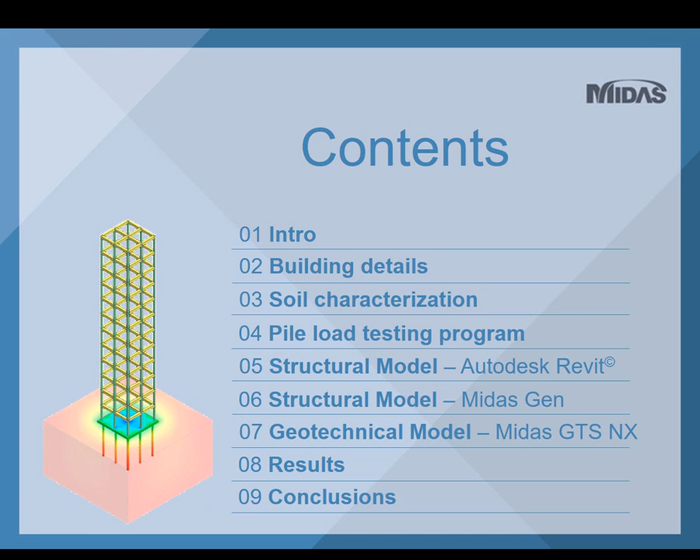The building, which is the focus of the presentation, is a 55-story building, about 168 meters tall, designed in a layered soil of low resistance. Because of the size of the building and the soil found at the site, soil structure interaction was necessary to evaluate the settlements and also to evaluate the behavior of the structure.

The structural team, in this case, did not work with MIDAS-Gen, and their platform did not export to Revit or to another format, so it was impossible to directly import their model. So what we did next was our team replicated the designed structure with the very same geometry, loads, and load cases used by the structural team. This model was fully created in Autodesk Revit. With the Revit-MIDAS-Gen link, the model was then exported to MIDAS-Gen, and after applying some conditions on Gen, the model was finally exported to MIDAS GTS NX, where the full model was analyzed.

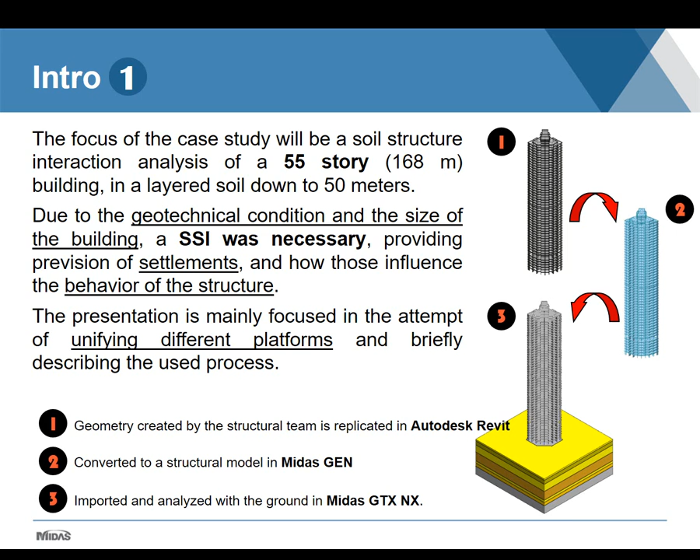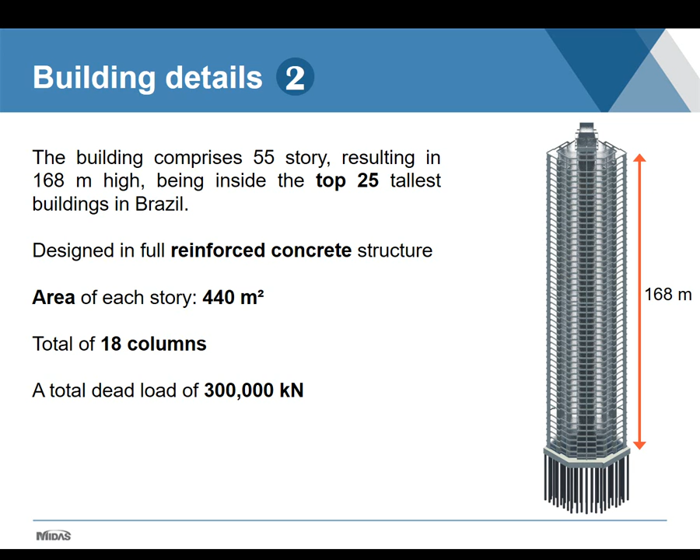As I said, the building comprises 55 stories, resulting in something close to 168 meters tall, meaning it's one of the top 25 tallest buildings in Brazil today. The whole structure is designed in reinforced concrete, which is the most common type of structure here in Brazil. Each story has an area of about 440 square meters. We have a total of 18 columns, which are actually structural walls because of their size, and a total estimated dead load of about 300 meganewtons.

Some other building details now about the foundation. It is a pile raft foundation with 106 CFA piles. CFA piles are continuous flight auger piles. Each one has 100 centimeters of diameter and 30 meters long.

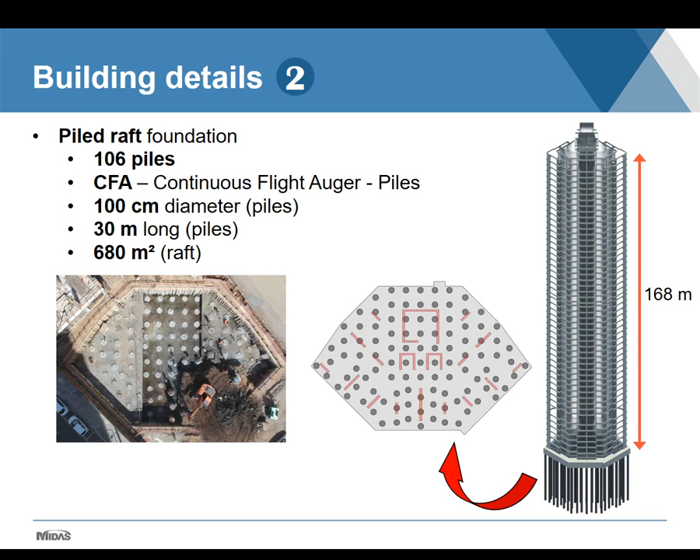Also, we'd like to say that in this region, the use of cone penetration tests to estimate pile load capacity became something usual in recent years, mostly due to the quality of the test compared to the standard penetration test. On the next slide, I'll show you some results of pile capacity prediction based on cone penetration tests.

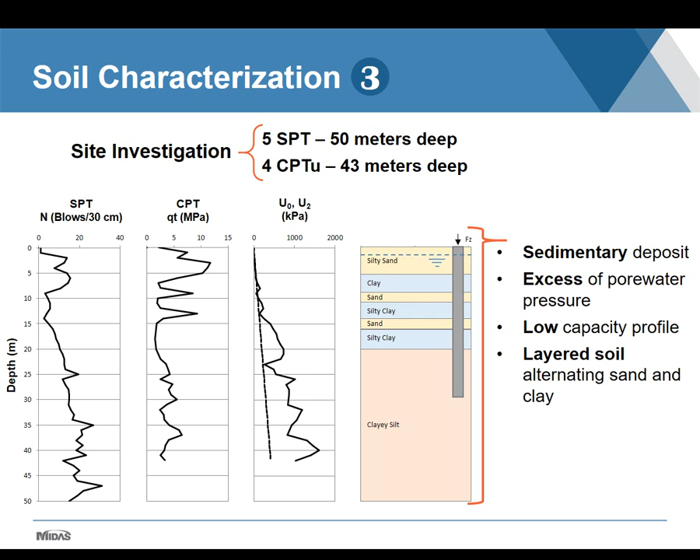A program of pile load testing was undertaken, which included 3 continuous flight auger piles tested to a maximum load of close to 9 meganewtons.

The static load tests were undertaken prior to the foundation construction, allowing a better understanding of the behavior of these piles. The results of the pile load test were compared to values obtained by theoretical approaches using methods based on SPT and CPT, standard penetration tests and cone penetration tests.

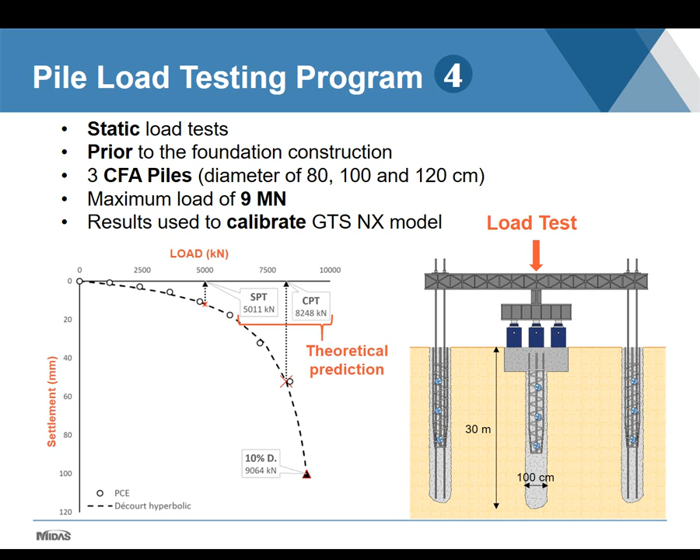Inside MIDAS GTS NX, the results from the pile load test were used to define the properties of the pile, as will be shown later. So it's very important to have pile load tests when designing a building foundation, especially tall buildings.

Let me show you a little bit more about the pile loading testing program. These are some pictures of the test. The figure shows the pile load scheme composed of the hydraulic jack, which applies the load, and reacts against the reaction frame.

In this case, we had 4 reaction piles to resist the forces. Also, an important piece of equipment is the load cell, which allows the loads to be read with more accuracy.

The geotechnical designers, in this case ourselves, started with the design of the pile load test. So we defined the type of pile, the diameter, the length, the maximum testing loads, and also the reaction system. We followed up the execution of the test, and later interpreted the results.

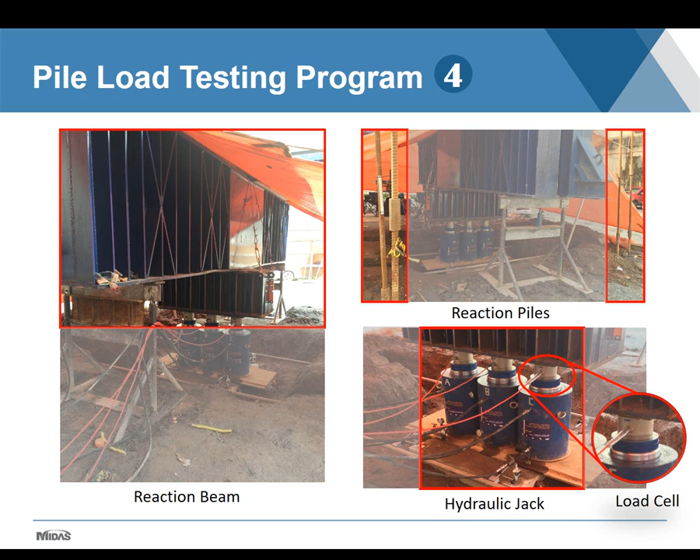Now heading to the structural model, it all started in Autodesk Revit. In this case, the structural team did not work with MidasGen, and their platform did not allow exporting to Revit or to any file format that could be imported by MidasGen. So our team replicated the design structure with the very same loads and load cases used by the structural team.

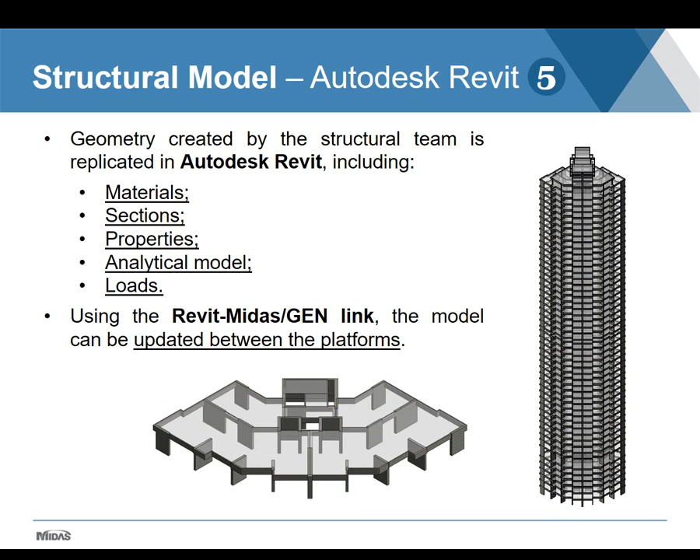All the materials, sections, properties, the analytical model, and loads were applied directly on Revit. I'll show you a bit of the Revit interface now.

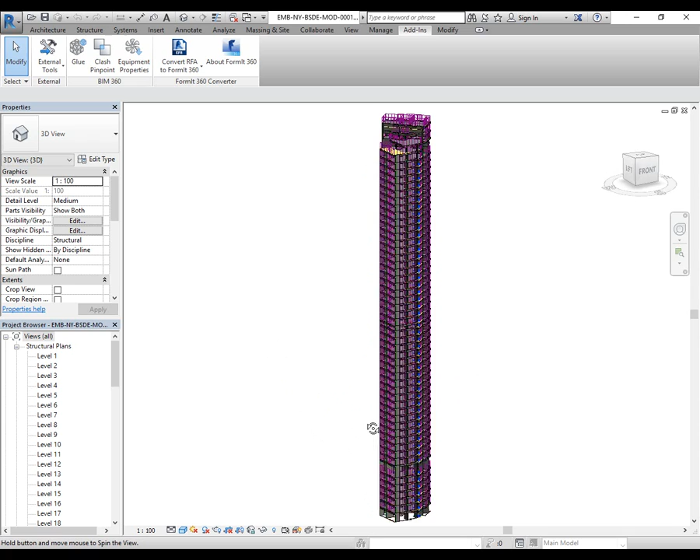So this is Autodesk Revit 2017, and we have our full model of our building here. You can see all the geometry, and you can see the arrows, which represent the applied loads.

The thing is, we want to take this model, which is now in Autodesk Revit, and export it to MidasGen. So there's a function, a link that needs to be installed on our computer. If you install it and go to add-ins in Revit, then to external tools, we have this option to send model to MidasGen.

Once it opens, you just choose the name you are going to save it as. Here you can choose the element size, which is basically the size of the mesh you are exporting. In this case, we have meshes in our slabs and also in our structural walls, so we can choose finer or coarser elements. Also, you can choose the unit and just click send, and it will save the MGT file.

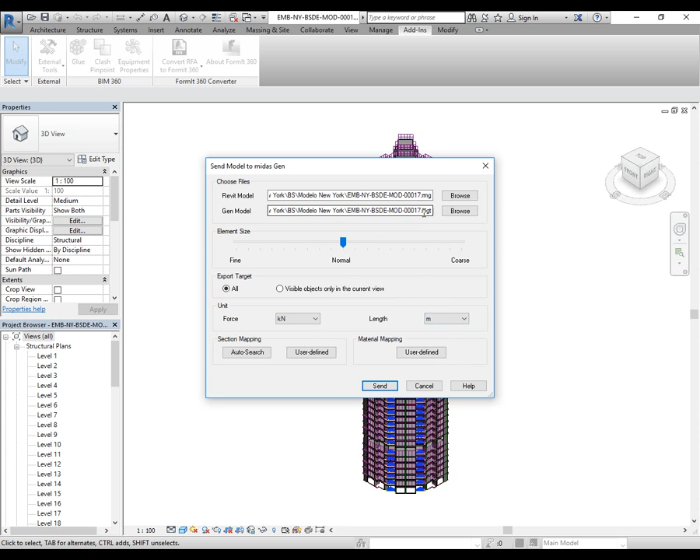I'm not sure about saving it now because it takes a bit of time, so let's head back to PowerPoint.

So this is already the view of the model imported to MidasGen, including all the geometric information, sections, materials, and properties. I'll show you a bit in the MidasGen interface.

So this is just a blank new file where we go to the menu and import the MidasGen MGT file, which was exported by Revit. Let's choose this one that I've saved before. It takes a little bit of time to open up.

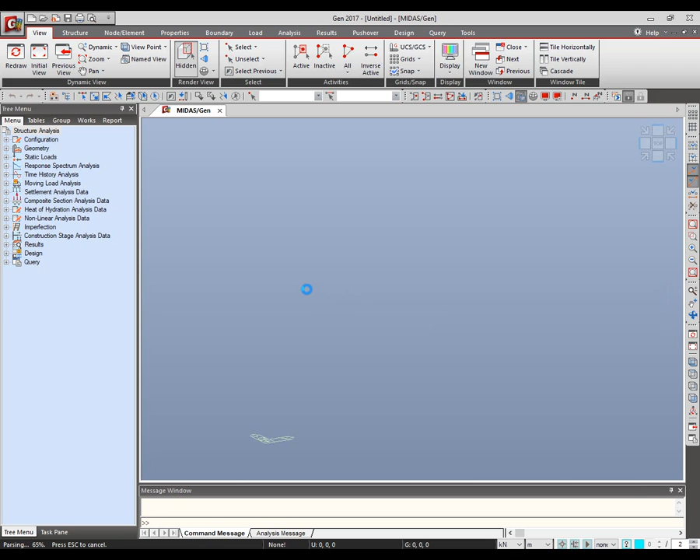As you can see, the message shows it was imported with 0 errors and 0 warnings, which is good. Sometimes you may get some errors, so I'll just take a closer view for you to follow up.

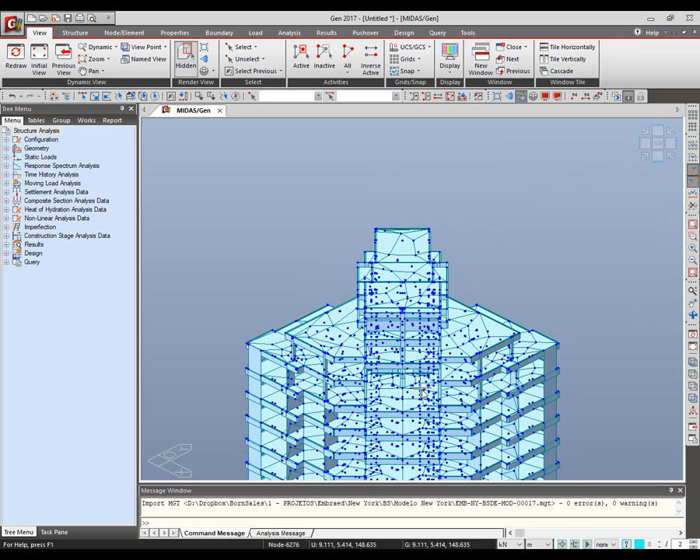You can see the mesh. We could have chosen an option to get it finer, so the mesh should be finer. We also show here in the menu what was imported. If you see, it already says the number of stories, so we just need to configure the information to speak the same language, let's say with MidasGen.

We have the material, they were imported, from the concrete that we have predefined there in Revit. You also have all the predefined sections that were defined in Revit. We have information about thickness, because of the slabs and structural walls. We have some boundary conditions, some elastic links, and some beam releases, which are also defined in Revit.

Lastly, we have the loads. In this case, we have just applied the dead load case, but we may also apply others. We left live loads and wind loads to be applied directly on MidasGen.

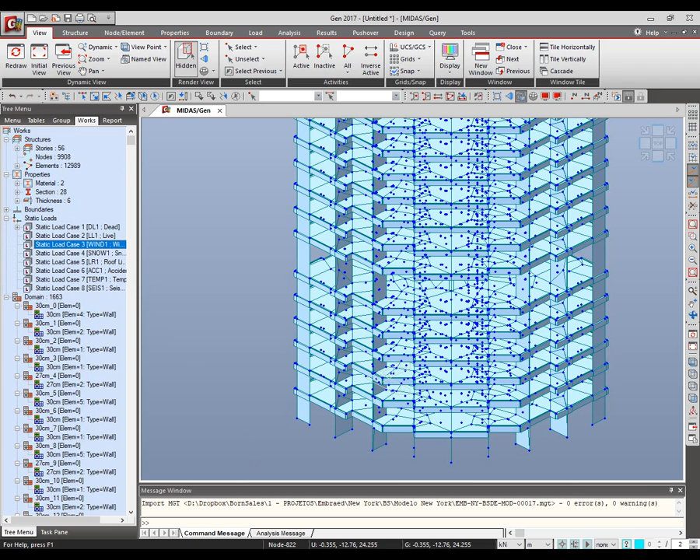So let's head back to PowerPoint. Inside MidasGen, some conditions were applied: confirming the story information, some initial boundary conditions, and the wind loads, which in this case were derived from wind tunnel results, so they were simply applied in MidasGen.

The model was then analyzed to check for inconsistencies, comparing the reactions obtained by the structural team on their platform and those obtained by us on MidasGen. The difference was smaller than 5%, which we considered a very good approach. Along with the structural team, the behavior of the model was approved and then exported to Midas GTS to start the foundation iteration process.

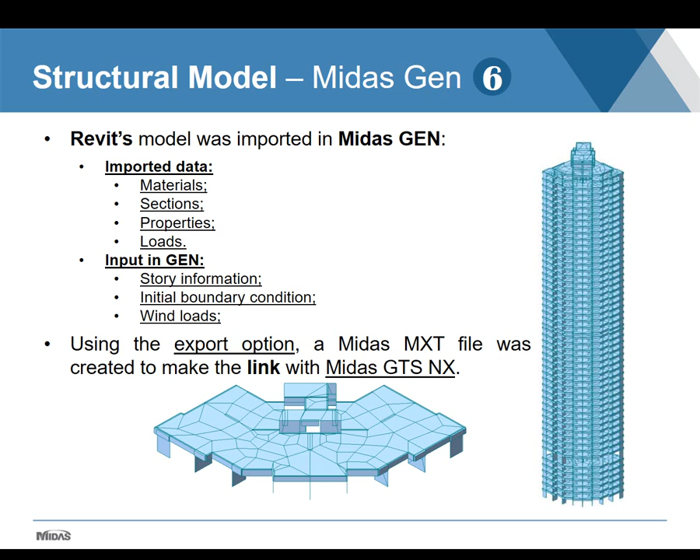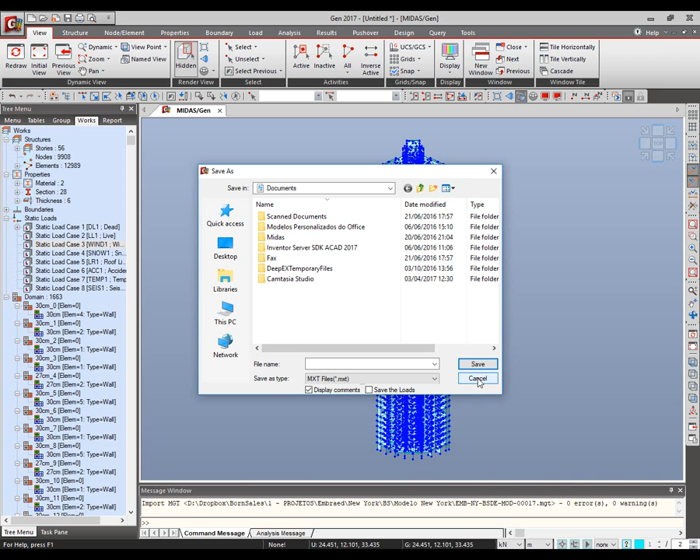So let's head back to MidasGen. I want to show how to export. We have the full model here of the structure, and we want to export this to open in Midas GTS. So we go to menu, export, and we choose the MXT file for GTS. You just save it, and later we can open it in Midas GTS.

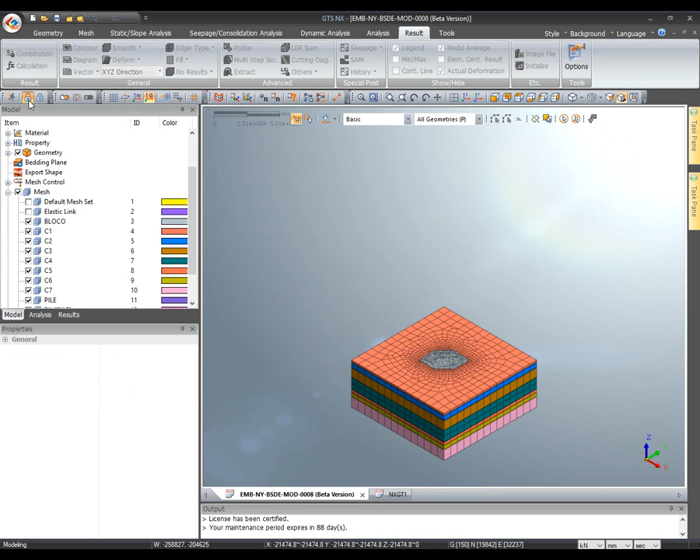Let me show you the model in Midas GTS NX. So let's check it out, first the model itself. We have all the soil layers, but let me show you first the raft and the piles: all the 106 piles and the 3.5 meters thick raft.

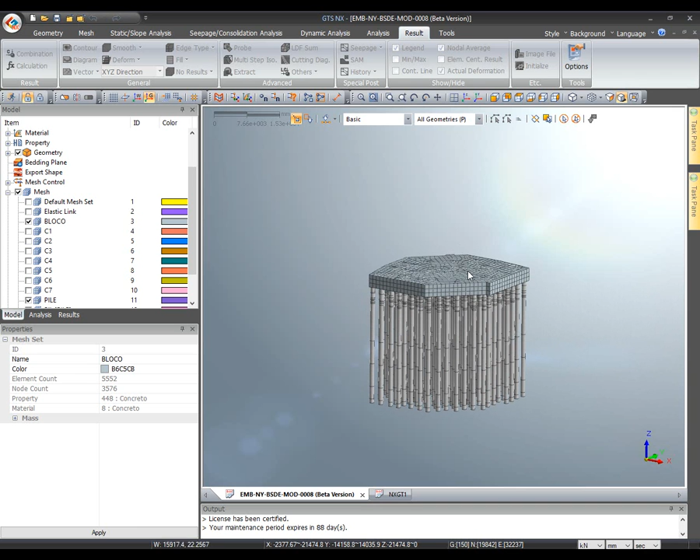So let's go back to PowerPoint.

For the pile model type, there are some ways to work with piles in numerical models. The best way would be to consider all piles as solids and define the interface properties to simulate its behavior. Well, the problem is that the model becomes way too heavy to compute.

So a solution that can also be done in Midas GTS-NX is to consider the pile as a beam element type, converting a line to a beam and creating an interface to simulate its behavior. Besides it not being the best solution numerically speaking, it still offers good results when calibrated. So the model is equal to the soil, which is composed of a solid mesh, plus the piles, which are lines converted to beams, and interface lines to solid.

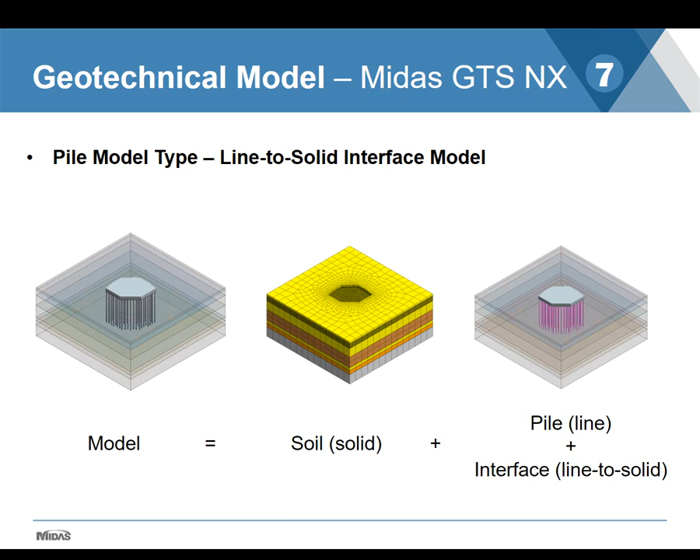So let me show you the piles. They are actually just lines that are converted to a beam, so they have a cross section, and also they have properties of a pile, so we can specify what their behavior is.

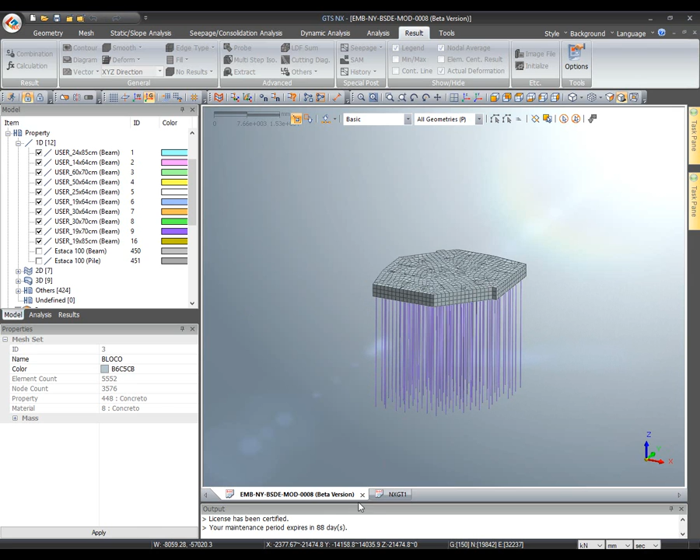So trying to obtain better values, we've done a pile load test calibration. Inside Midas GTS-NX, we've created a finite element model to calibrate the load settlement behavior. The geometry of the pile was reproduced, different load steps were defined, and the pile parameters were changed through trial and error attempts. That's what we call a class C prediction, where parameters are changed looking for convergence with measured values.

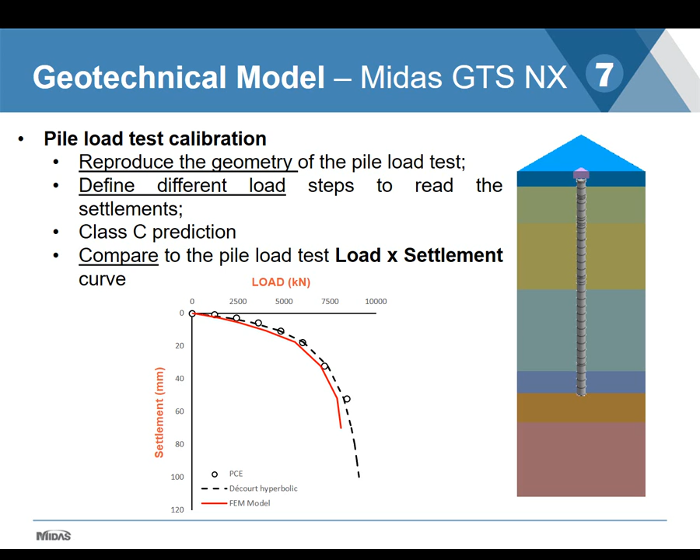The load settlement curve presented shows the pile load test results along with the finite element model created. The values obtained seem to fit well with what was measured, and so this kind of model might be tricky because it might need many attempts, but we really believe that this is the way to go. You have better information, a better model if you go this way.

So some numerical models of building foundations are made only by applying a load or pressure at the base of the columns. It is like retrieving the load values for each column from the structural team and applying it directly to the model. This might neglect the distribution of loads in the superstructure and its stiffness or rigidity, as you wish. So those results might then deviate from the real behavior of the structure, showing higher values of differential settlements.

So looking at our model, we've tried to create a full model, which is the soil plus the pile raft plus the structure. As was said, it is understood that the differential settlement behavior seems to be closer than when using other kinds of models. Another advantage is being able to evaluate different load cases directly, and also wind loads and other types of loads. So let me show you the complete model here.

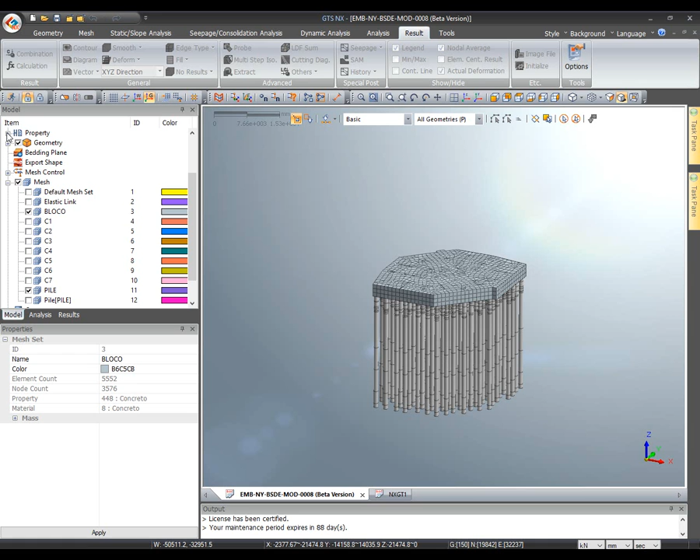We have the pile raft. Now we have the building, the superstructure, and all the soil layers, all 7 soil layers that we've created for this case.

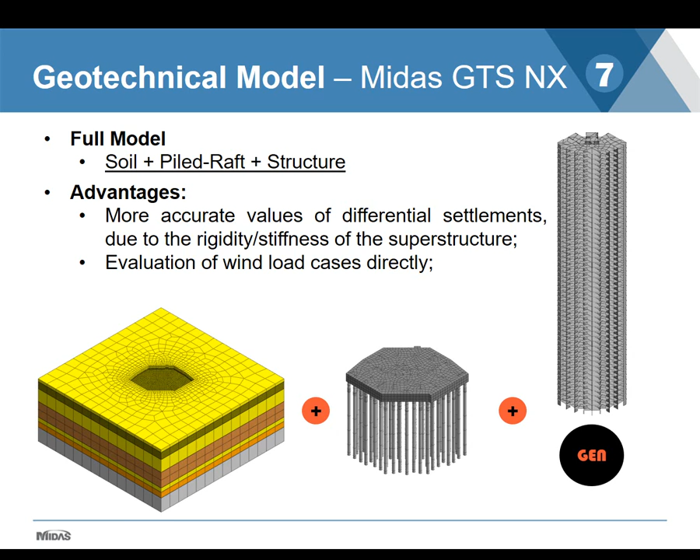As stated before, as this model is working with the whole superstructure attached to the foundation, the results of settlements, and especially the differential settlements, tend to be more realistic due to the stiffness and rigidity of the superstructure.

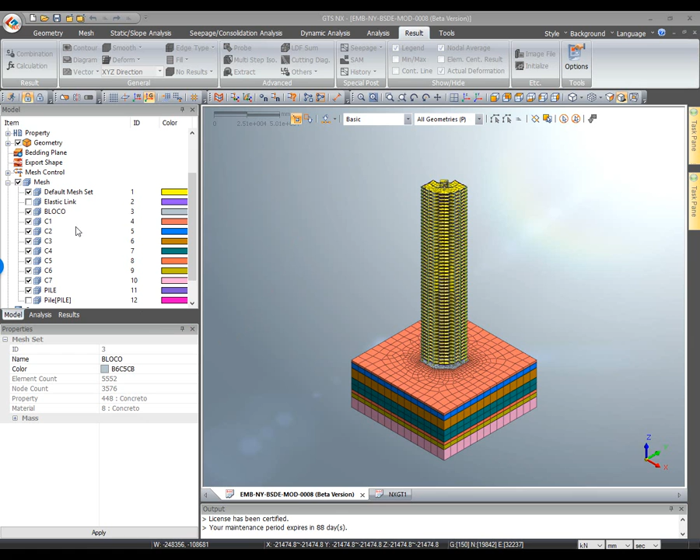Let's take a look at the results in Midas GTS. Let's see only the piles. So in the results displacements, we can check the values of settlement in each pile.

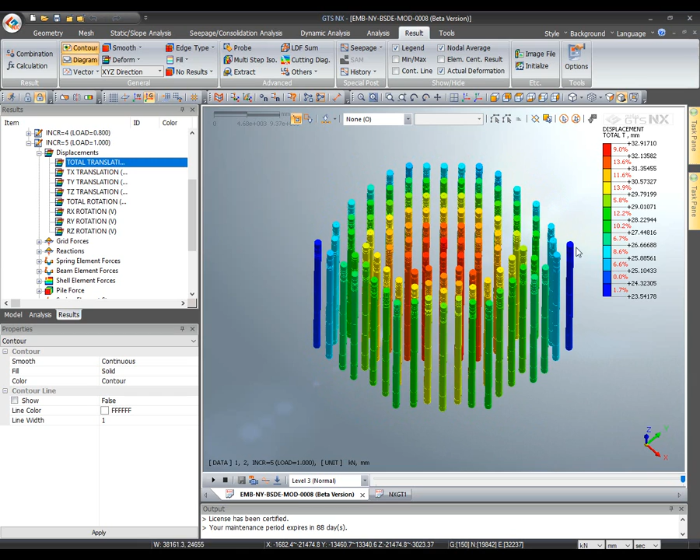We can also select each pile node by its top and export these values of settlement. Here in the presentation we have called the settlement delta.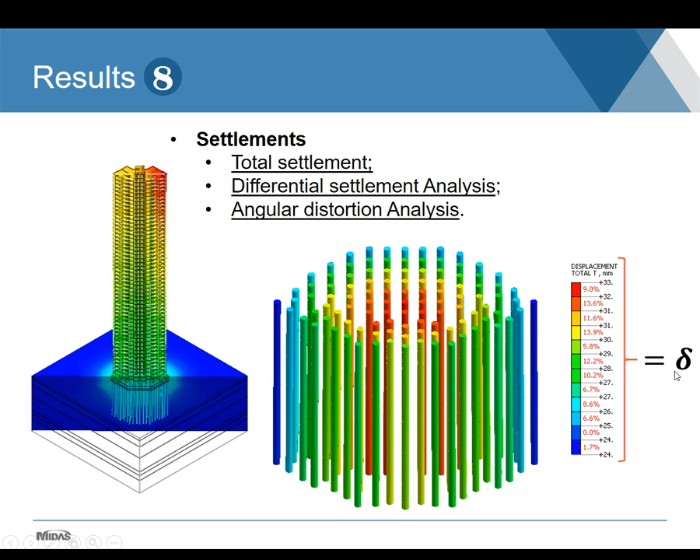Those springs are different for each pile, and this might be understood by us and by our structural colleagues. The reason for this is mainly the position of the pile inside the raft, which can be affected by the location of a column. We may understand this as a more or less loaded region, or due to pile group effects, which tend to decrease the performance of the pile, meaning that some may not offer the same reaction as others.

The generated springs for each pile may be sent to the structural team or simply exported back to MIDAS Gen. The very same thing can be done for area springs, for the consideration of a pile raft hypothesis.

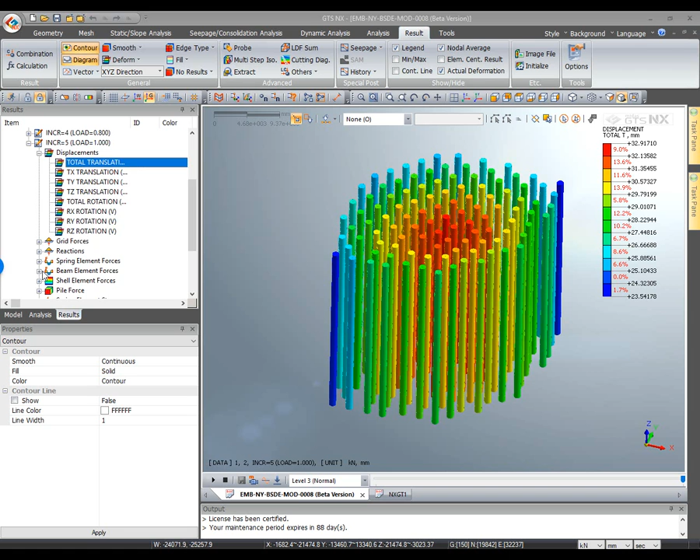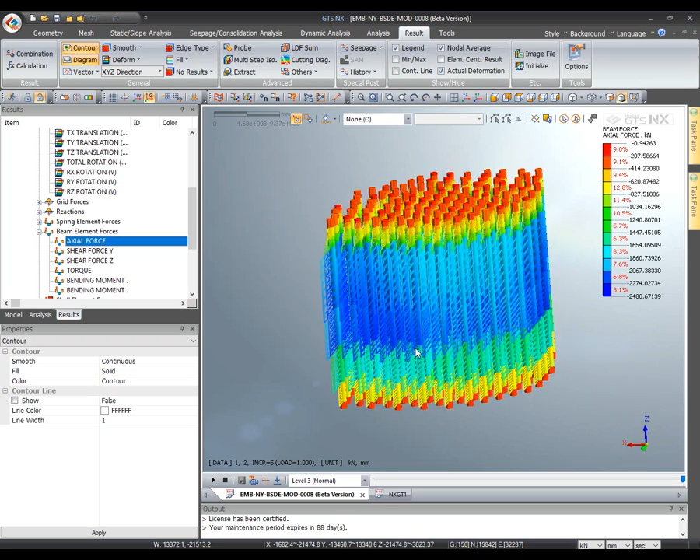Values of pressures above the raft might be divided by the settlement obtained at the same point. This can also be sent to the structural team or exported to MIDAS Gen. Taking a look at the results of axial forces in our piles, as I said before about extracting those values, we can extract the value of each pile. These values can be copied from MIDAS GTS and pasted into a spreadsheet in Microsoft Excel.

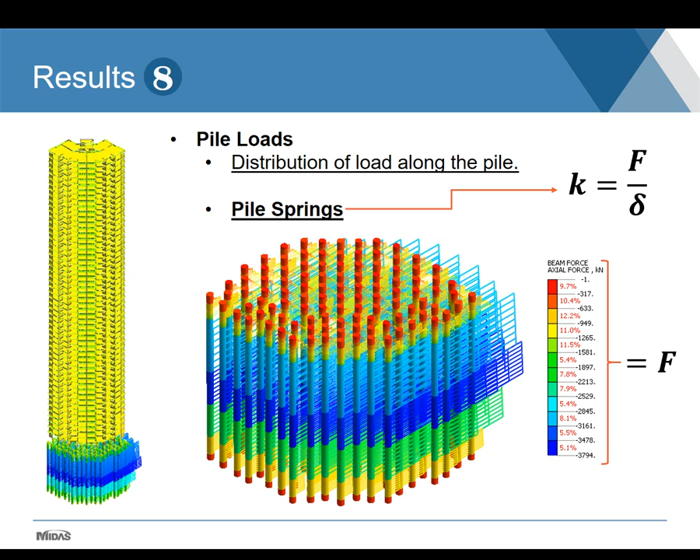So there we can calculate the spring and easily send it to a structural colleague. Another set of results retrieved from GTS-NX shows the values obtained for bending moments in the piles. These values are particularly important to define the structural design of these piles, as they are continuous flight auger piles. The reinforcement cage length is very important to define, as there is difficulty inserting reinforcement when lengths are over 12 or 18 meters. Special procedures might be required, such as special concrete and vibrators attached to the cage.

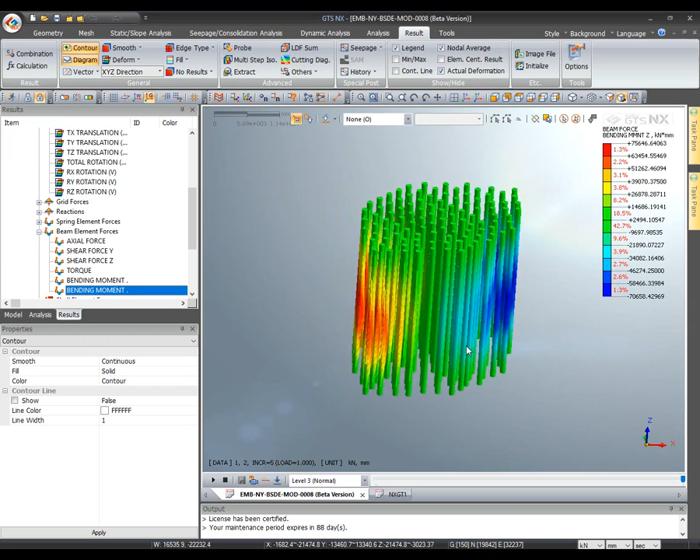These results might be particularly important when dealing with wind load cases, which may imply higher values in this situation. So let me show you the results of bending moment in the piles. We can check that the bending moments in the piles on some sides of the raft are much higher than those of the piles in the middle. This information is very good to retrieve through a model like this.

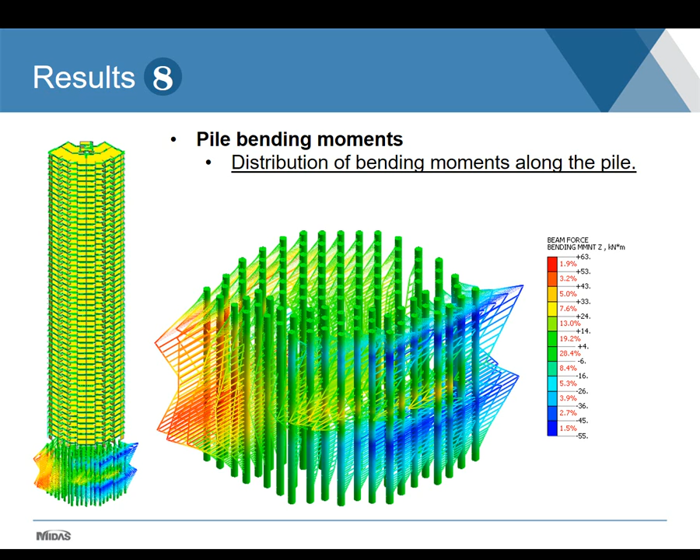For some conclusions, we consider that we had a successful interaction between Revit, Midas Gen, and Midas GTS NX. The key results from Midas GTS that we have analyzed are firstly the settlements of the piled raft foundation, which might be inside the range of tolerable settlements for this kind of structure.

For interaction with the structural team, springs can be created either for each pile or as area springs, which represent the contact of the raft with the soil. This kind of information can be retrieved from the software by selecting the correct nodes and exporting the values of loads and settlements. Dividing load by settlement, we get a spring.

In the case of area spring, we export the pressure and settlements and just divide pressure by settlement. Then we get an area spring. We have done this through Microsoft Excel, just copying the values from Midas GTS and pasting into Excel.

Normally, interaction between the geotechnical and structural teams is done through several iterations, starting with a set of loads sent by the structural team, which results in a set of springs calculated by the geotechnical team. Convergence between both models is then sought, and sometimes several iterations are needed for that. By the time a full model is established using the same platform, the number of iterations needed to converge is reduced. So we really believe that this is a good way to go.

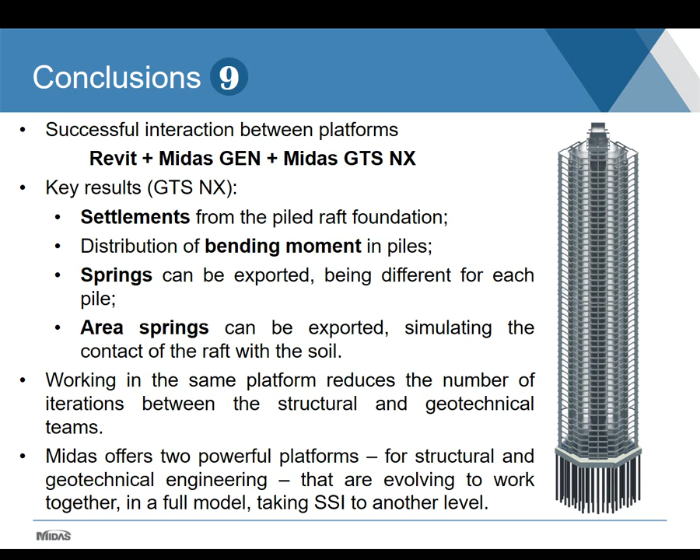Another thought is that we may have reached an excellent numerical model, but it really relies on the information we input into it. So having quality soil investigation to retrieve reliable parameters from the soil is crucial, and also having an instrumented pile load test is crucial. The results of our model all depend on the quality of this information.